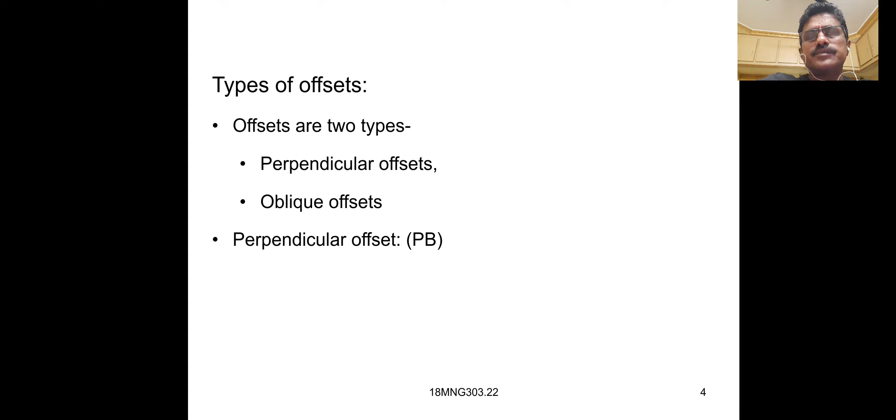Offsets are two types: perpendicular offsets and oblique offsets. Perpendicular offsets: when the angle of offset from a point on the chain line is 90 degrees, it is called perpendicular offsets.

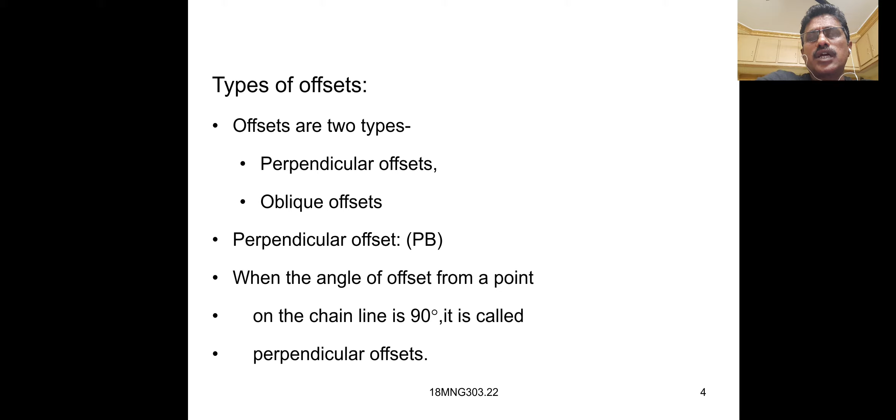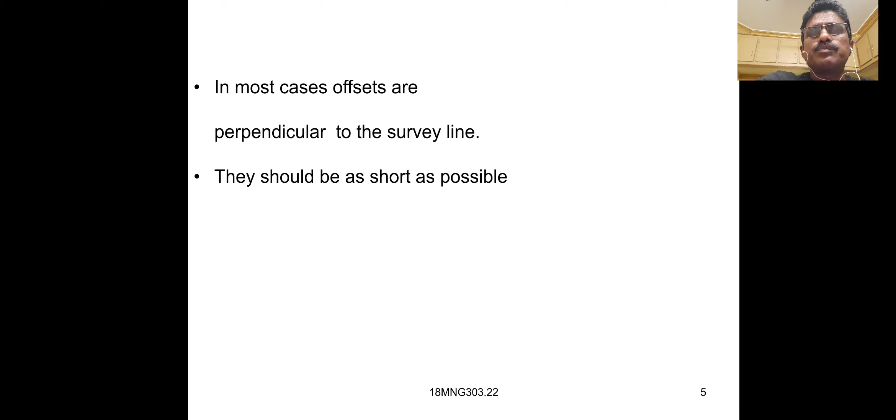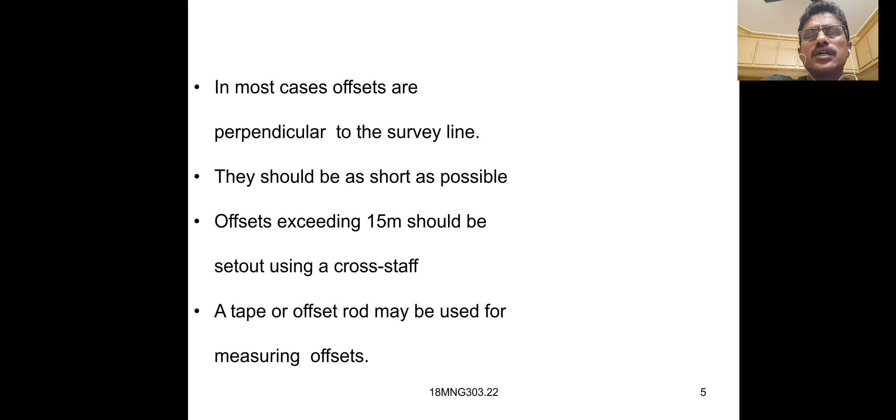They should be as short as possible. Offsets exceeding 15 meters should be set out using a cross-staff. A tape or offset rod may be used for measuring offsets.

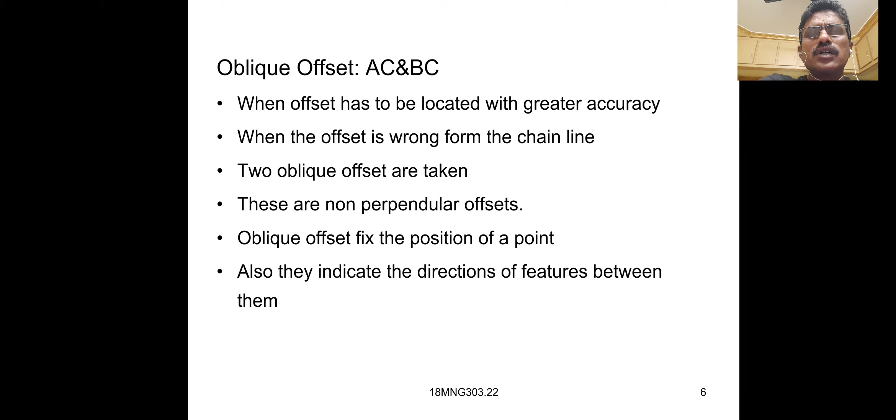Oblique offsets. When the offset has to be located with greater accuracy, or when the offset is long from the chain line, two oblique offsets are taken. These are non-perpendicular offsets. Oblique offsets fix the position of a point. Also, they indicate the direction of features between them.

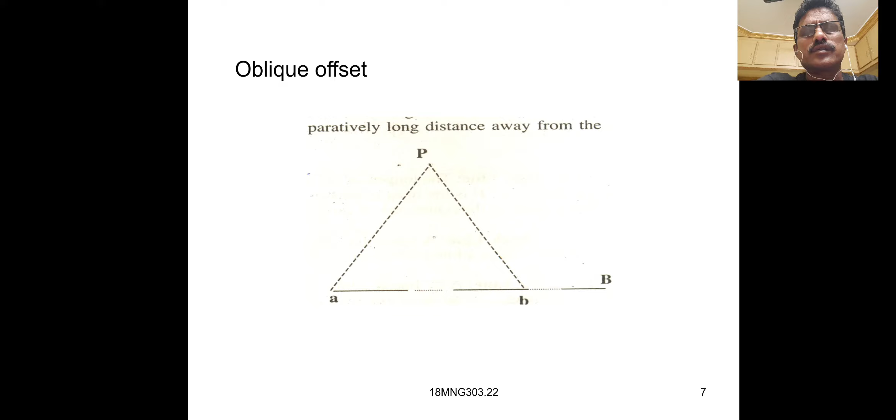Please see this diagram. The oblique offset.

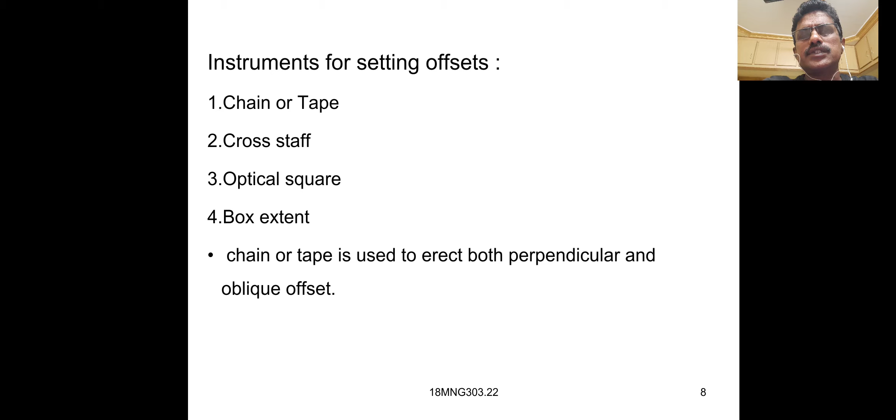Instruments for setting offsets: chain or tape, cross staff, optical square, box sextant. Chain or tape is used to erect both perpendicular and oblique offsets. Cross staff and optical square are used to set only perpendicular offsets.

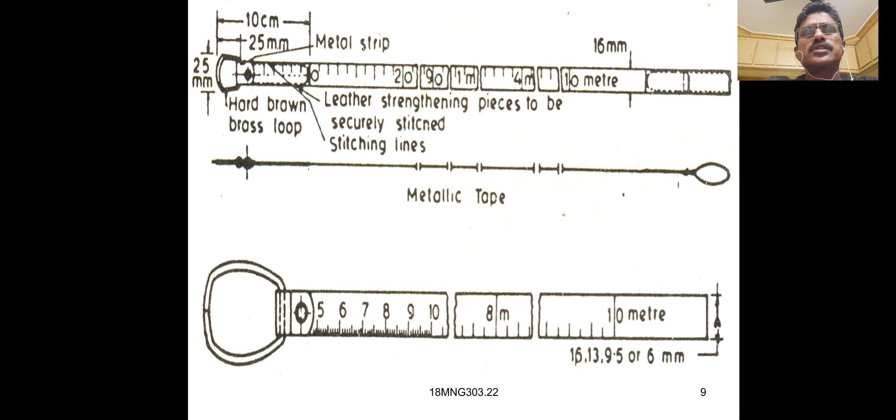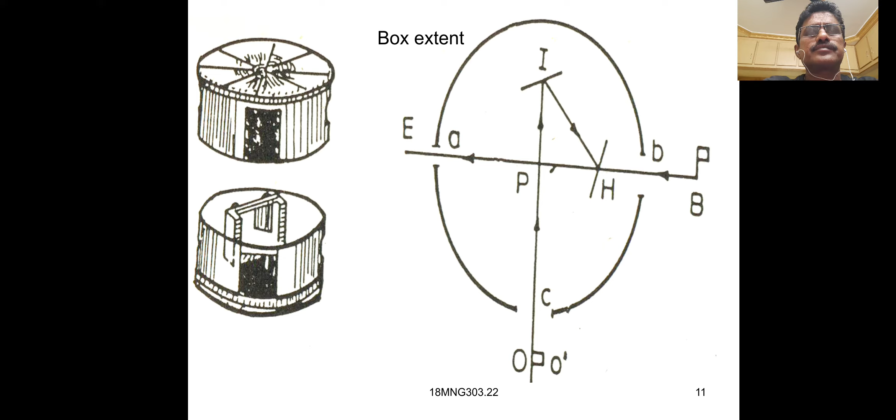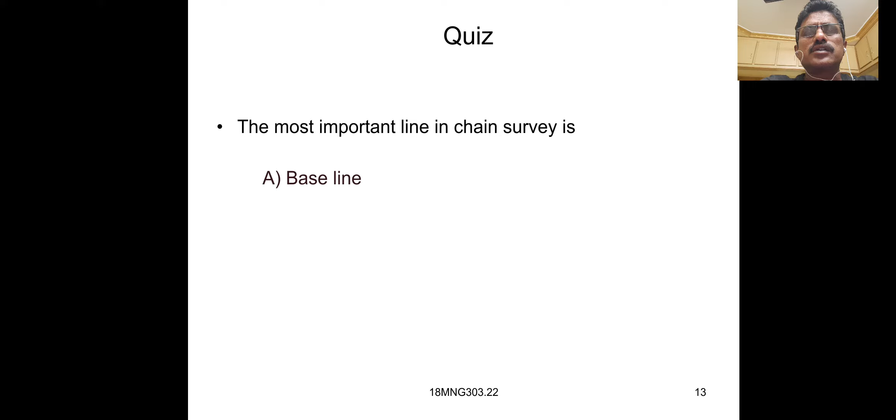Okay, in this class we have discussed the instruments for setting offsets and listed the types of offsets and their applicability. Okay, the most important line in chain survey is dash: baseline. The line joining the apex of a triangle to a point on the opposite side is called check line.

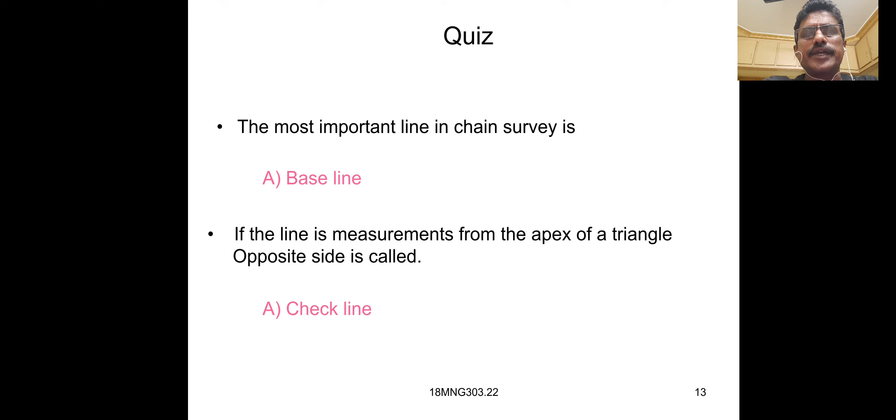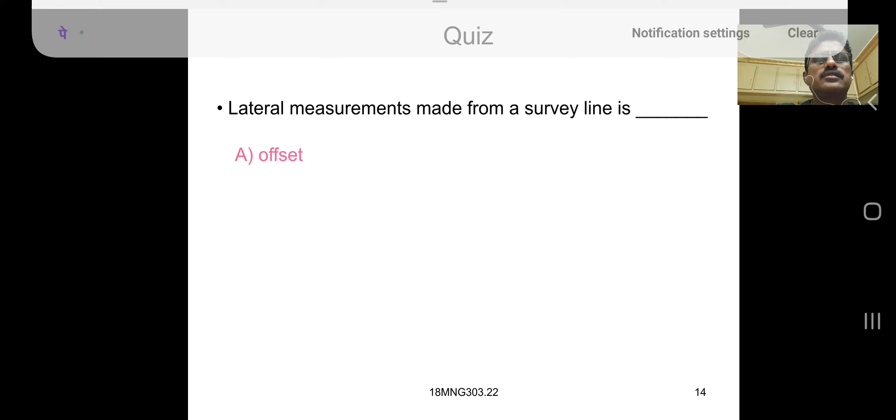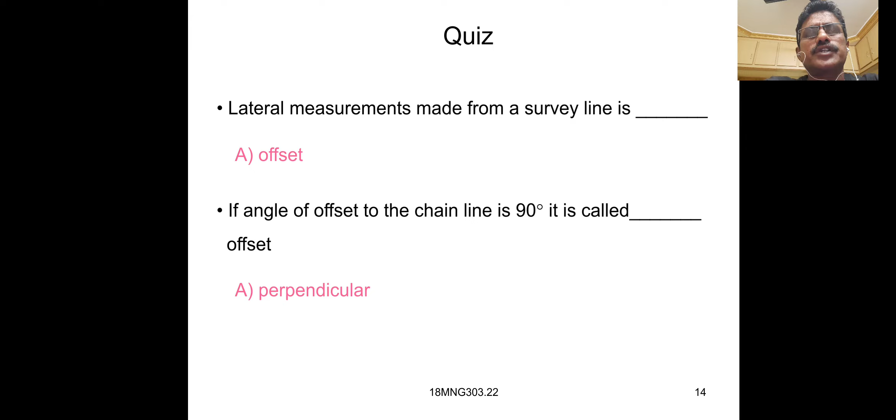Lateral measurement made from a survey line is dash: offset. If the angle of offset to the chain line is 90 degrees, it is called dash offset: perpendicular offset. If the angle of offset to the chain line is 90 degrees, it is called perpendicular offset. Lateral measurement made from a survey line is called offset. Okay, this topic is completed.